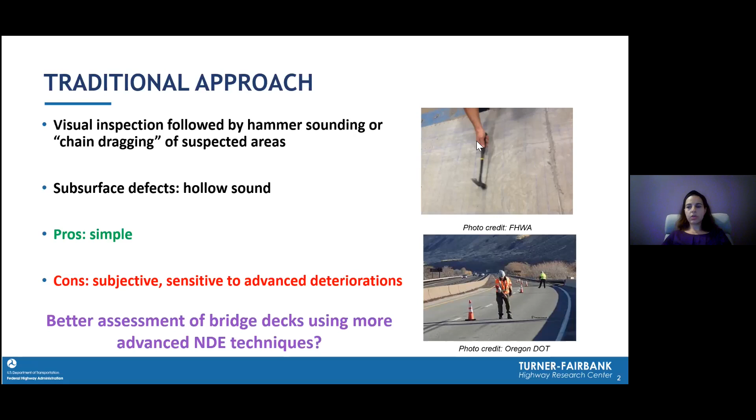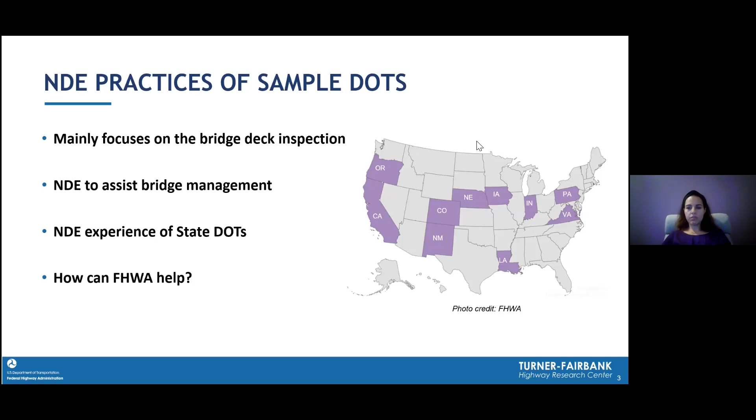Before I go to the current practices of states, I will go over the most common NDE technologies used by states. One of the most commonly used NDE techniques is GPR, ground penetrating radar, which uses electromagnetic wave pulses in the microwave band of the radio spectrum to image the subsurface features in the bridge deck, pavement, or tunnel. The radar reflections from inside the material are then imaged to evaluate the condition of the medium.

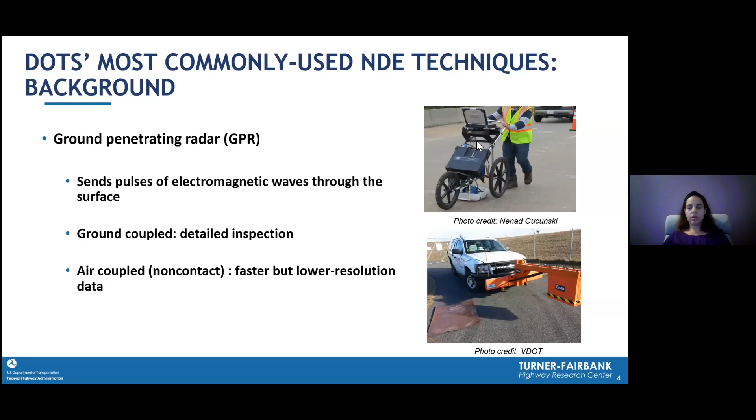GPR, as you may know, can be ground coupled or air coupled. It can be attached to a vehicle and move at traffic speed, but it provides lower resolution in exchange for speed compared to ground coupled. Another common NDE technique is infrared thermography, which images the temperature of the subject and the flaws in the bridge deck, tunnel, or pavement. It cools and heats at different rates, so it provides a surface image of the location of the flaw.

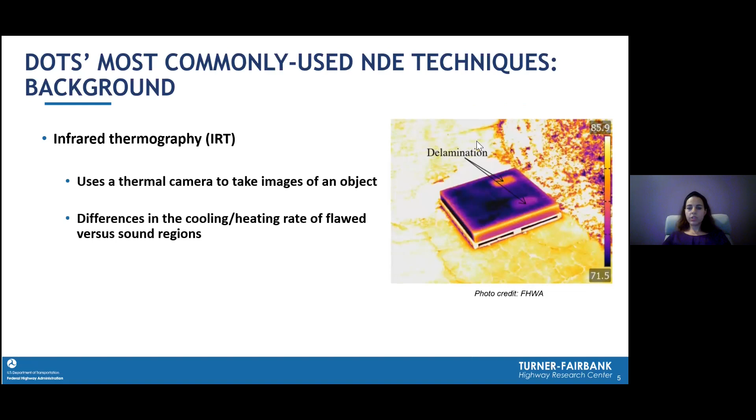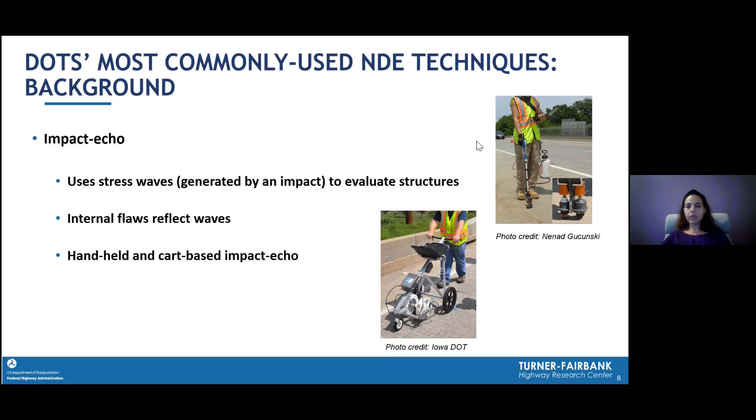And the last of the most commonly used NDE techniques is impact echo, which is an acoustic based or stress wave based NDE method in which stress waves are transmitted into the material or medium and then reflected back from the flaw, delamination, or damage. So now we move to the states. First one is California.

While California DOT, called Caltrans, is researching and starting to implement newer NDE technologies, the agency's bridge deck inspection primarily is visual inspection. Like most state DOTs, Caltrans supplements its visual inspection with visual aids like spotting scopes. As a follow-up to the visual bridge inspection, they do hammer sounding and chain dragging to further evaluate suspect areas.

They have a high speed inspection program in place for pavement inspection and crack detection. They have cameras to collect surface images of pavement and bridge decks, and then they apply artificial intelligence technology to identify details like crack location, crack width, and crack density on the surface. They indicated that the program is highly effective, especially in urban areas where it is difficult to close lanes for visual inspection.

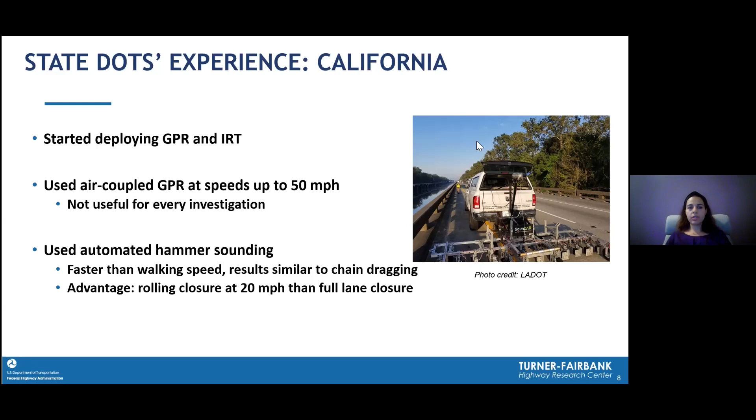The agency also investigated automated hammer sounding. This technique was faster than conventional hammer sounding at walking speed and yields similar results to chain dragging, but at higher speed. The main advantage is that they can do it at like 20 miles per hour from the lane closure perspective. Instead of a full lane closure, they can do it at a faster speed.

In terms of barriers to NDE implementation, Caltrans indicated that the primary limiting factor is resources. With the number of bridges in California, current application of advanced NDE technologies is better focused on project level application or investigation of known problems. They are not currently using these technologies for all bridges, just at project level, and not routinely using GPR, IR, or other NDE technologies for bridge deck evaluation. So it's just for the known problems.

The agency indicated that GPR is a good tool, but it requires significant training and experience to use effectively. Similarly, IR is helpful and a complementary tool to GPR. But again, they need some internal development to deploy these technologies.

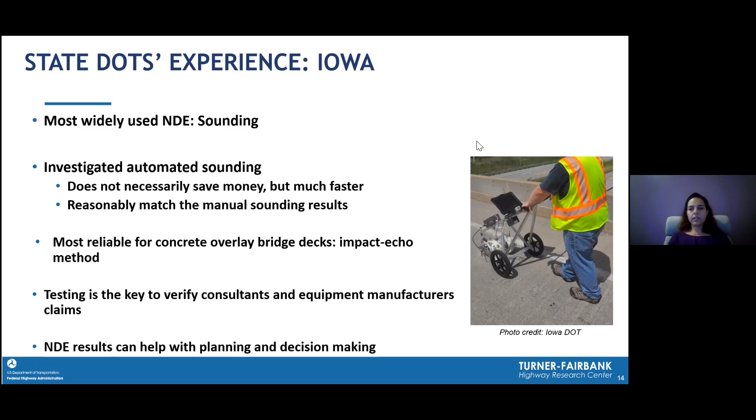And they found that validation testing, such as coring, is the key to determine if an NDE technique does what consultants and manufacturers claim. They believe that NDE can help in planning and decision making, but they have not done any return on investment analysis to quantify the added value of NDE. So when asked how FHWA can help, they reported that more work to evaluate the effectiveness and validation of various NDE methods is necessary.

They welcome advice on how to pick the most suitable and the best NDE system based on their particular inspection problem.

The next state is Louisiana. Louisiana DOT, or LA DOT, has experienced a culture shift toward the use of NDE technologies. They believe that chain dragging is an aging technology, and only more experienced inspectors still use it. And actually, the new generation of inspectors does not view chain dragging as the best technique.

One reason is that LA DOT has the third highest bridge deck area in the country. With such long bridges, some more than 17 miles, which is around 30 kilometers long, it's not practical to chain drag all the decks. So the agency has moved toward NDE, and they rely heavily on NDE techniques to help them identify potential problems within the bridge deck. They use high-speed GPR and IR to minimize the lane closure and as a way to prioritize which bridge decks need work.

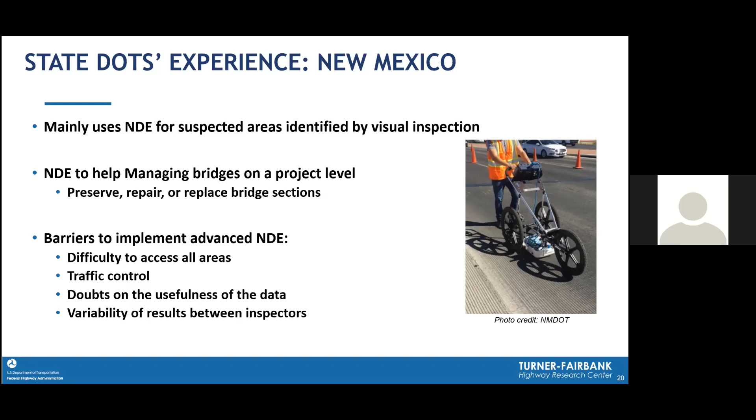One point that they mentioned was that, for example, GPR is not a magic bullet. It offers value when applied appropriately, and it can help determine whether a deck is a candidate for preservation versus replacement. They noted that they found GPR works well as a first pass, but a second, more in-depth scan or a more in-depth technology is necessary to produce more detailed results that are critical for decision making, whether to preserve, replace, or repair the deck.

For overlay inspection, NMDOT indicated that chain dragging is the most reliable technique to detect the debonded overlays. It seems to work in seeing through asphalt and epoxy overlay, but does not appear to do a good job with the latex modified concrete.

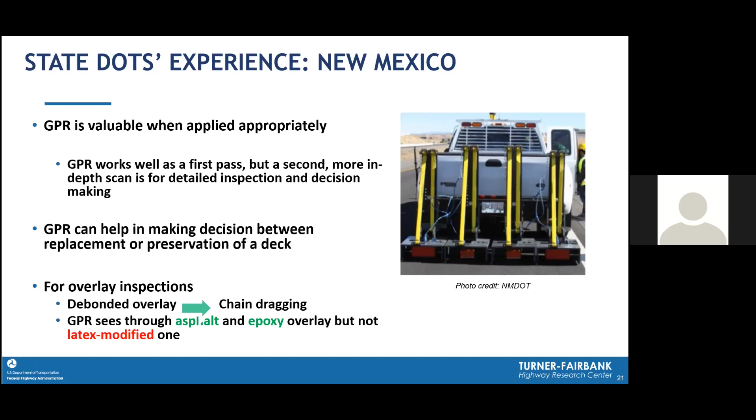How can FHWA help? They indicated that FHWA could contribute to NDE training and education opportunities, particularly because of the turnover in NMDOT staff and lack of internal resources. They also need assistance to get information about advances in NDE technologies through webinars, videos, peer exchanges, meetings, etc. And finally, they indicated that it will be important to keep expectations reasonable when comparing NDE lab performance and real-world NDE performance.

Oregon DOT, or ODOT, reported that they extensively employ chain dragging on concrete decks, and they use magnetic particle inspection and ultrasonic inspection on steel bridge elements. After performing some experimental projects using advanced NDE methods on concrete, the agency concluded that chain dragging will perform the same inspection as the more advanced NDE method and do it faster and cheaper. They felt that manufacturers oversold the capabilities of some of the advanced NDE technologies, and the NDE techniques don't necessarily do a good job at detecting delamination compared to chain dragging.

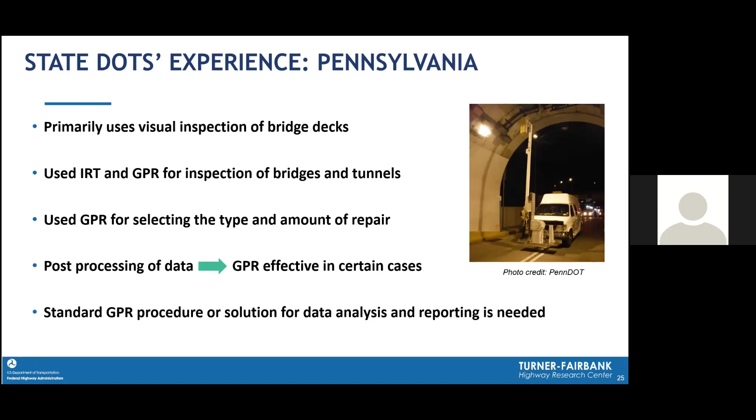They also performed some tunnel inspection using NDE. The goal was to demonstrate and evaluate the ability of handheld NDE methods and high-speed mobile scanning methods, such as air-coupled GPR and vehicle-mounted infrared thermography, to detect deterioration in the tunnel lining. They also tested traditional physical inspection techniques like hammer sounding and coring in some limited cases to evaluate the high-speed NDE results. So they concluded that no single technology by itself can provide all information they need to assess the condition of tunnel lining.

They believe that the best application for NDE technology is to use one or two NDE methods in combination with traditional hammer sounding. They noted that while GPR correlated well with hammer sounding, it doesn't seem to be a practical solution over traditional physical methods for visual inspection because of the cost and time required for data processing. But they also noted that the cost and time may be reduced significantly during subsequent NDE inspections because the test procedure is already established. So the cost would be decreased in future inspections.

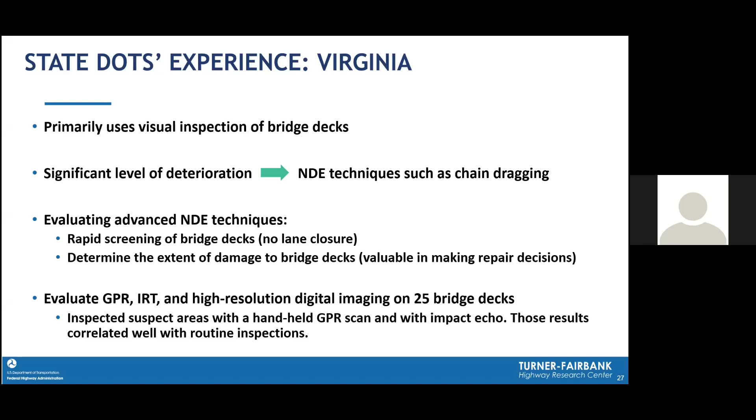They also performed NDE research in several other areas, such as time-lapse IR and magnetic flux leakage inspection. MFL, or magnetic flux leakage, is a method where a magnetic field is introduced in a steel cable or tendon, and then magnetic field sensors are used to look for leakage that represents potential underlying damage. These are not routine inspections, and they are only used for a few special investigations.

For example, VDOT noted that they employed a magnetic flux leakage NDE system to inspect some post-tensioned tendons with some potential problems, that they got good results, and verified the technology in the lab on a few mock-up tendons with pre-built defects. And again, they found excellent correlation.

They also reported that their approach in applying new NDE technologies is to conduct research first and then perform some trial projects on the more promising technologies, and finally look for the best potential application of the technology. The agency usually performs initial implementation of the new technologies with the consulting companies. So they want to implement the new technologies to reduce the lane closure and save money, but they first need to validate the technology performance and then go to enhancing the technology.

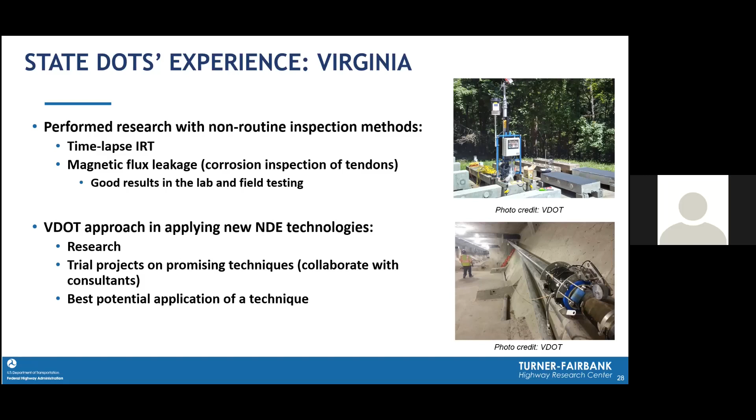There were many cases that WDOT reported where they saved money. In one example, initial tests showed that there may have been an issue with the cover depth of the reinforcing bar, and the more detailed scan with GPR revealed that the entire top rebar mat had sunk due to the misplacement, and it left a thick, unreinforced layer of concrete at the surface. So the contractor replaced the entire deck before the bridge was put in service, which avoided future problems and saved cost.

And finally, when asked how FHWA could help WDOT, the agency stated that open communication and discussion help states to keep up with what NDE technologies are being used and what new technologies are emerging for potential future application.

So in summary, our review provided a snapshot of how 10 states use, evaluate and implement both basic and more advanced NDE methods as part of their bridge inspection and management program. All states have applied NDE techniques at some level. Several of the sample states have successfully established advanced NDE technology. For example, Indiana and Louisiana have both improved their ability to efficiently manage bridge deck maintenance and repair through new NDE programs and processes.

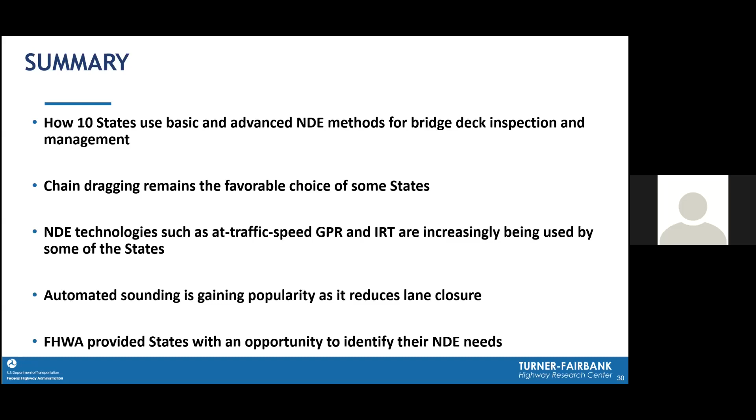So we at the Federal Highway NDE program thoroughly evaluated and prioritized these recommendations from the states to ensure that the NDE program is addressing the needs of the states. So we recently published the NDE program strategic plan that has incorporated the states' needs. This strategic plan consists of 3 goals and objectives and a list of strategies to meet these objectives. So the first goal is related to stakeholders, to enable effective application of NDE technologies.

And the second goal is technology related, and the objective is to improve the accuracy, reliability, and benefit of NDE technologies by developing new technologies and improving existing technologies. And the last one is related to implementation, and the objective is to support implementation of deployment-ready technologies and accelerate the implementation of market-ready and reliable NDE technologies.